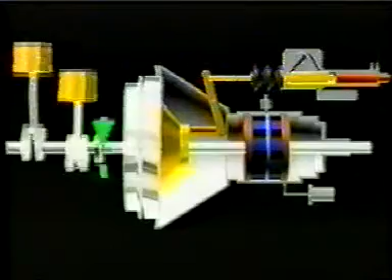The major difference between the semi-automatic transaxle and the manual transaxle is in the clutch pedal mechanism. In the case of the manual transaxle, pressure is applied to the master cylinder when the clutch pedal is pressed down. For the semi-automatic transaxle, however, the DC motor generates pressure and sends it into the master cylinder, because the semi-automatic transaxle has no clutch pedal mechanism. The engine torque is transmitted to the transaxle corresponding to this pressure and the clutch diaphragm force.

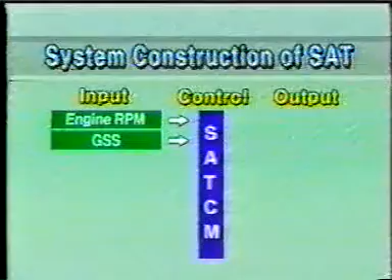The semi-automatic transaxle system is composed of 7 sensors, the semi-automatic transaxle control module, and 4 parts to be controlled. The 7 sensors are engine RPM, the gearbox input speed sensor, the throttle position sensor, the push-pull sensor, the gear position sensor, the clutch release cylinder position sensor, and the actuator position sensor. The 4 parts controlled are the power control unit, the electric valve, starter relay, and the buzzer.

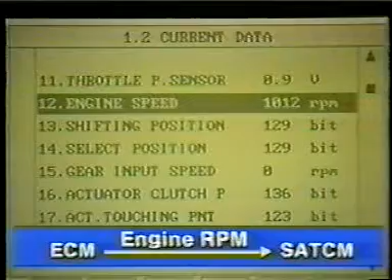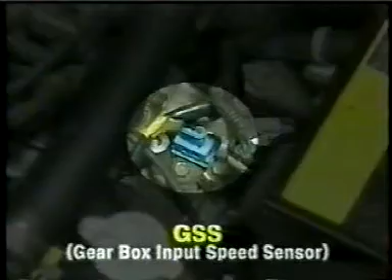The engine RPM signal is sent to the semi-automatic transaxle control module from the engine control module. It determines operation time of clutching and declutching with the gear speed sensor. The gear speed sensor, attached to the transaxle case as a Hall sensor type, detects the rotation of the input shaft and feeds input shaft speed to the semi-automatic transaxle control module. The measuring range is from 100 to 8,000 RPM.

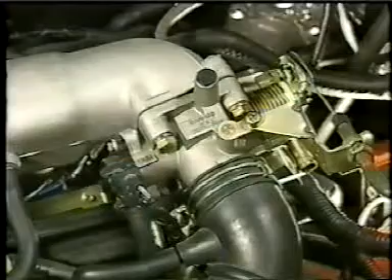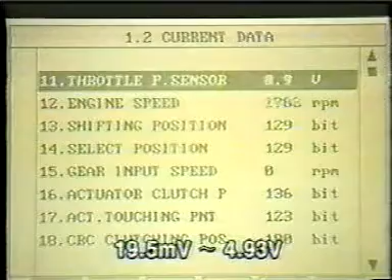The throttle position sensor utilizes a variable resistor to monitor the throttle position. By the opening amount of the throttle, the semi-automatic transaxle control module is able to calculate engine load and vehicle acceleration. The throttle position sensor's maximum value is 4.93 volts, its minimum value is 19.5 millivolts, and the idle range is 6 to 19% opening value.

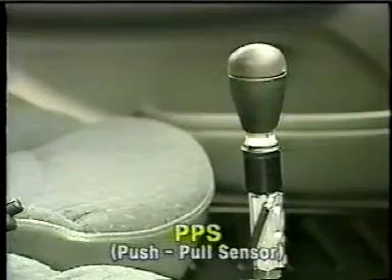The push-pull sensor is placed inside the gear knob. The switch inside the sensor becomes an open or closed circuit according to lever operation. An on-off signal is sent to the semi-automatic transaxle control module so that it is able to recognize the intention of the driver shifting. This sensor has 12 plus or minus 4 Newton meters of operation force and 60 degrees of operation range.

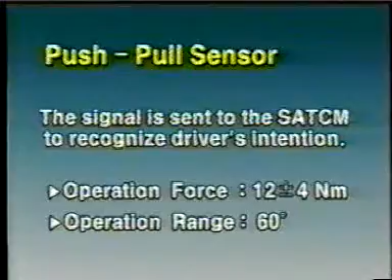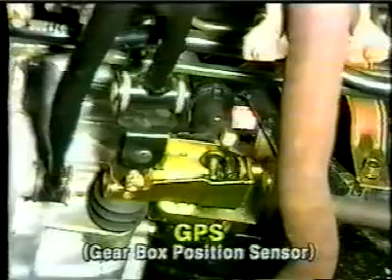The gearbox position sensor, located on the gearbox control rod, monitors the current gear position, sending signals to the semi-automatic transaxle control module. The gear position sensor measures the passage movement, which is the up-down movement of the shift lever, as well as selection movement, which is the left-right movement of the shift lever. It also detects the initial gear connection and the present gear position, providing a basis for operating clutch engagement and disengagement. The operating range of the gear position sensor is 60 degrees in selection and 30 millimeters in passage direction.

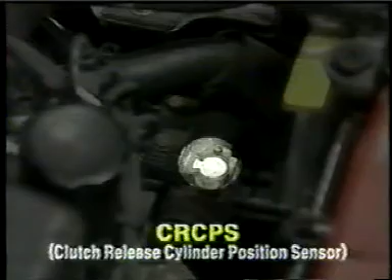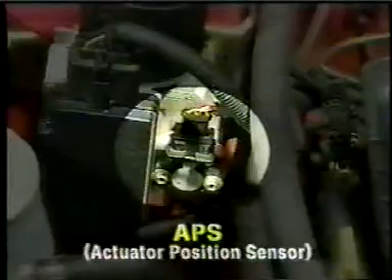The clutch release cylinder position sensor has a function of monitoring the operating distance of the clutch push rod and compensating clutch wear adjustment. The actuator position sensor monitors the position of the DC motor, controlled by the power control unit, feeding signals to the semi-automatic transaxle control module.

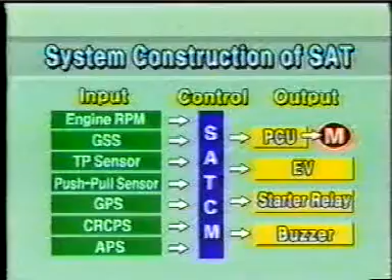Now, we will take a look at the output items controlled by the semi-automatic transaxle control module. The power control unit operates the DC motor on receiving the signal from the semi-automatic transaxle control module. The power control unit becomes ready for operation by receiving the ignition on-off signal. The parking brake is available when the ignition is set to off.

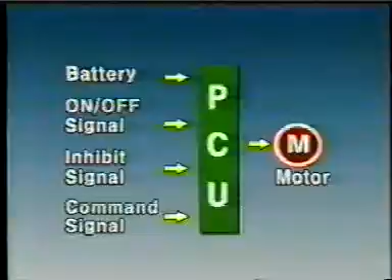The power control unit is composed of an inhibit signal and a command signal. The command signal functions to engage or disengage the clutch through operating the DC motor on the basis of the duty signal of the semi-automatic transaxle control module. A 50% duty value indicates clutch engagement and disengagement boundary. A duty value below 50% indicates operation of the DC motor to disengage the clutch, and a duty value above 50% indicates operation of the DC motor to engage the clutch. Namely, the DC motor's operating speed is controlled by the duty value of the command signal.

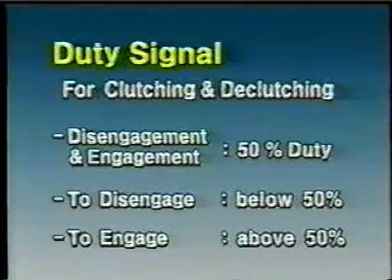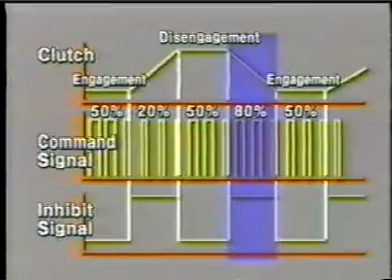The inhibit signal, which controls the command signal for the DC motor operation, controls shifting time. Consequently, shifting time is determined by the inhibit signal, and the DC motor's operating speed in the shifting process is regulated by the duty value of the command signal. The DC motor is controlled by the power control unit.

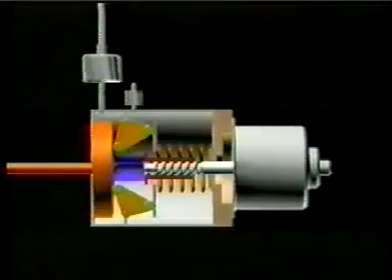The clutch is disengaged when the DC motor operates counterclockwise and applies force to the link and spring, generating pressure into the master cylinder to operate the hydraulic system. In reverse, the clutch is engaged when the DC motor operates clockwise and applies force to a diaphragm spring.

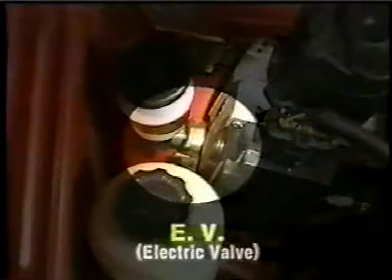The electric valve, which is of the normally open type, functions to open or close the oil passage by the duty signal of the semi-automatic transaxle control module. When the ignition is on, the electric valve closes the oil passage.

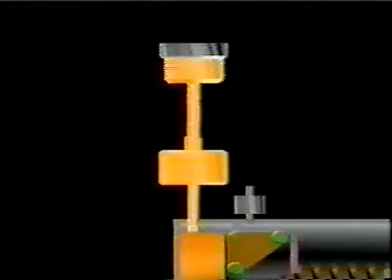When an actuator malfunction is found, the electric valve is opened to engage the clutch by using diaphragm force. In addition, the electric valve functions to compensate for changes in the clutch release cylinder operation distance caused by oil expansion and clutch wear while disengaging the clutch.

The start relay operates at some special conditions to prevent an unexpected accident when the vehicle starts. The start relay allows the engine to run only if the gear is in the neutral position and engine RPM is below 500.

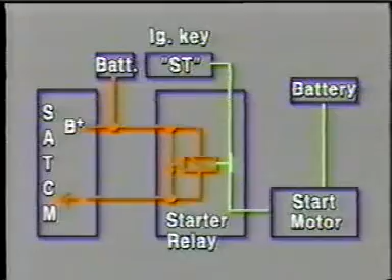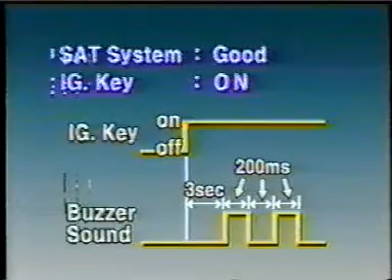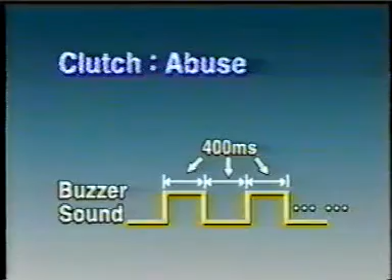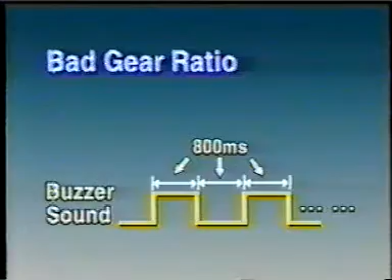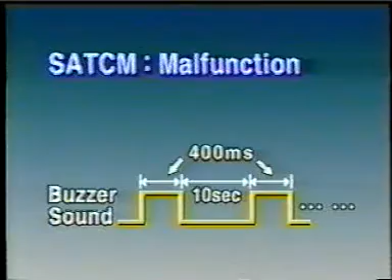With clutch abuse, it sounds continuously for 400 milliseconds every 400 milliseconds. Bad gear ratio, it sounds continuously for 800 milliseconds every 800 milliseconds. Fault in control components, not an operating procedure, and contents of permanent memory are incoherent: it sounds continuously for 400 milliseconds every 10 seconds.

In this turn, we will see the function of the semi-automatic transaxle. The control mode consists of 5 categories: engine starting mode, vehicle drive mode, gear shift mode, vehicle stopping mode, and engine stopping mode. The semi-automatic transaxle enables the engine to start by operating the DC motor to disengage the clutch within 250 milliseconds when the ignition is turned on.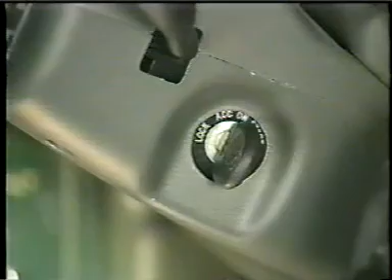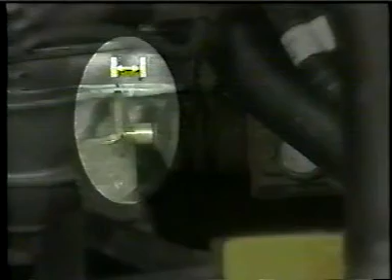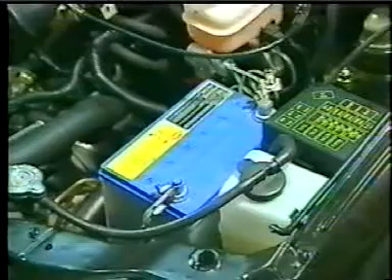The system is energized and the gear lever is in the neutral position. The condition of engine start is gear lever in neutral position, engine stopped, and clutch disengaged. However, if battery voltage is too low, the starting mode will be changed to the pushing mode.

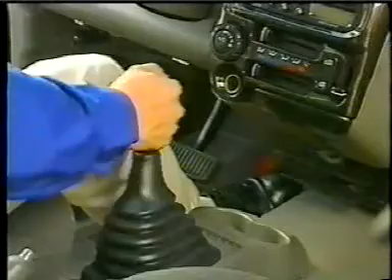Turn the ignition on when the engine doesn't start due to low battery voltage. Push the vehicle to reach approximately 5 kilometers per hour and then shift into second gear so that the clutch gets engaged and the engine starts. On this occasion, the buzzer sounds as the vehicle speed reaches about 5 kilometers per hour.

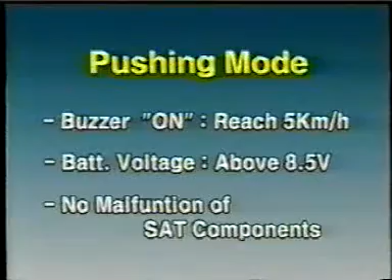However, in this pushing mode, battery voltage should be above 8.5 volts to operate the DC motor, and no malfunction should be found in the semi-automatic transaxle components.

The vehicle drive mode is broken down into accelerator pedal operation and rolling action. The required conditions for the starting mode by accelerator pedal operation are when the vehicle is stopped, the engine is running, and the gears are disengaged.

In this condition, if the accelerator pedal is depressed after shifting into first, second, or reverse range, the engine RPM will increase and the clutch will engage. When the clutch is engaged, the speed of the engine and the input shaft will synchronize.

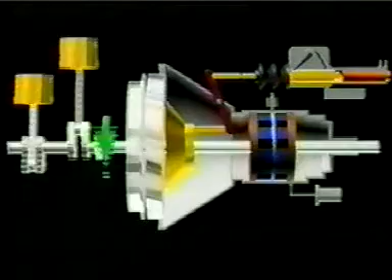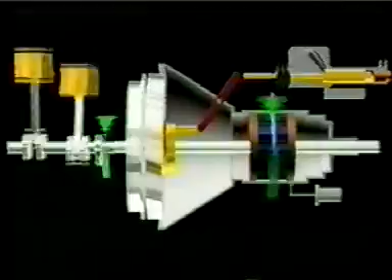The required conditions for the vehicle drive mode by rolling action are that the gear is engaged when the vehicle is on a downhill slope and when the gear speed sensor is higher than the engine RPM. This is to escape the possible danger of causing freewheel movement on tires when the clutch is disengaged.

To eliminate the possibility of such danger, the clutch is engaged regardless of the accelerator pedal when a gear is engaged.

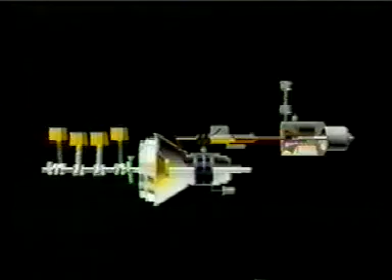The clutch is disengaged as enough force is applied to the gear lever after releasing the accelerator pedal. When a gear is engaged by shifting, the clutch is ready for engagement. At this moment, the depressed accelerator pedal begins the shifting mode. However, if vehicle speed is excessively high, clutch engagement will be limited to avoid overrun.

Under the engine running and clutch engaged condition, if the brake pedal is depressed, the clutch will quickly disengage to reach an idle RPM and the vehicle will stop. When the ignition switch is turned off after the vehicle is stopped, the clutch returns to the engaged condition and the system will be stopped.

The engine starting mode makes it possible to restart the engine, and it is the function of the semi-automatic transaxle control module to run the vehicle by continuously performing the previously explained modes.

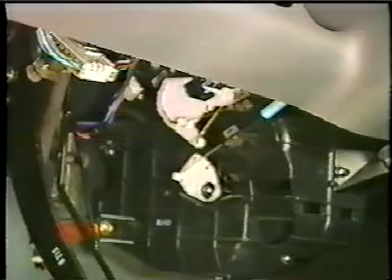The diagnosis of the semi-automatic transaxle system is possible only by the Hi-Scan with the following 5 functions: diagnostic trouble code, current data, flight record, simu-scan, and the learning mode. First, let's see the diagnostic trouble codes of the Hi-Scan.

Please refer to the shop manual for a more detailed description of the related parts when a diagnostic trouble code is encountered.

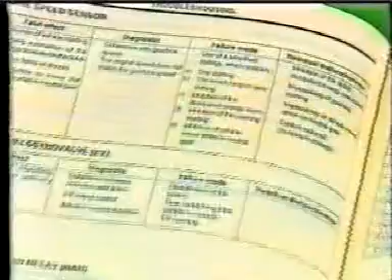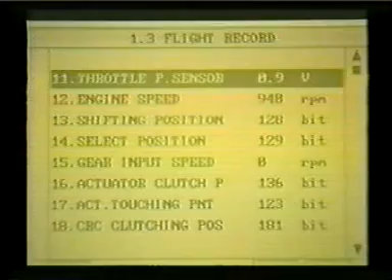Next, current data functions. This data assists technicians to effectively diagnose and repair the vehicle by knowing the current vehicle state. The flight record mode provides the function of recording the value of selected sensors which need checking. A system malfunction might be easily detected and repaired by reviewing memorized data coming from the flight record mode of the Hi-Scan.

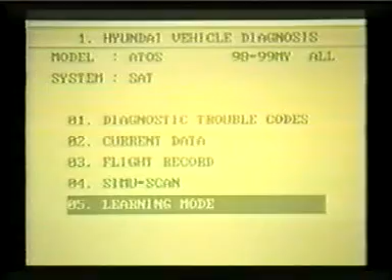The learning mode is used to determine whether the system abnormality remains or not and initializes the initial value of the gear position sensor and clutching point. In addition, the learning mode must be conducted when the semi-automatic transaxle system is manufactured, or when such parts as sensors, actuators, or clutches are replaced.

The engine will not start if this mode is not followed in the manufacturing process. Moreover, the engine will not run, or even if it runs, shifting shock and increased clutch slip may occur in case this mode is not fully conducted after replacing or adjusting sensors, actuators, or the clutch in the field. The learning mode procedure takes 2 to 3 minutes.

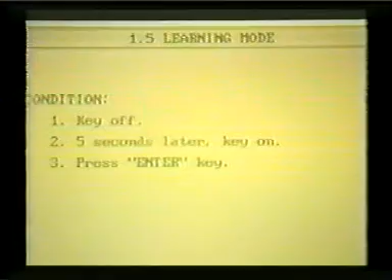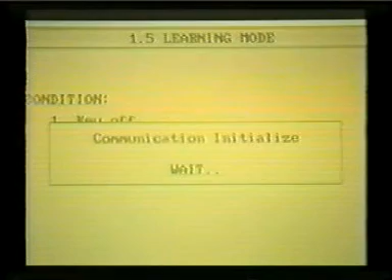An initial screen will be displayed if the learning mode is chosen. Following the order on the screen, turn the ignition switch on 5 seconds after turning the switch off, and the learning mode will begin. Press the yes button if the buzzer sounds. If not, press the no button. In case the buzzer doesn't work, check the buzzer-related items and try again.

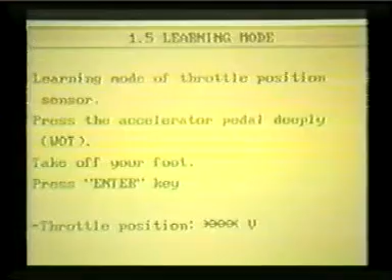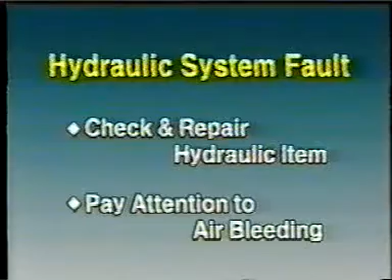The position of the actuator and the clutch release cylinder, with the mention of successful initialization, will be displayed on the screen if the buzzer normally works. When the hydraulic system is faulty, check and repair hydraulic operation-related items and perform the learning mode again. Pay particular attention to the air bleeding state.

The learning mode of the throttle position sensor shows up on the screen. Press the enter button after fully depressing and releasing the accelerator pedal to retrieve the throttle position sensor value. If the throttle position sensor associated items are defective, repair and try the learning mode again.

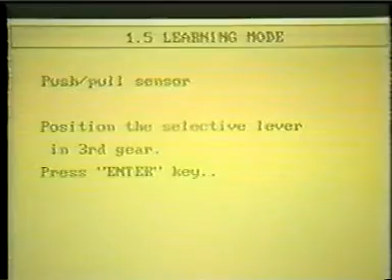With reference to the learning mode of the push-pull sensor, press the enter button after shifting the gear lever into neutral, and press enter after shifting the gear lever into third. In the same way, do this for the fourth gear. If the push-pull sensor related items are faulty, check and repair them and try the learning mode again.

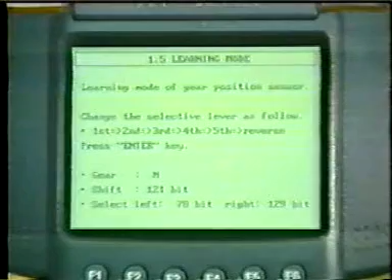The learning mode of the gear position sensor shows up on the screen. Press the enter button after shifting the gear lever into first, second, third, fourth, fifth, and reverse in turn. Keep that condition for a while, verifying whether correct shifting is conducted, and the left-right value of the gear position and shift will be displayed on the screen. In case the learning mode is not progressing, do the learning mode again. If still negative, check and repair the expected items and try the learning mode again.

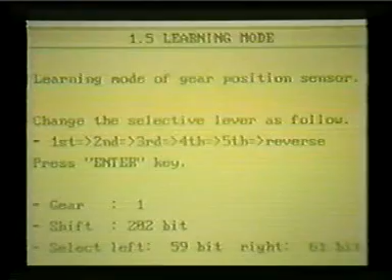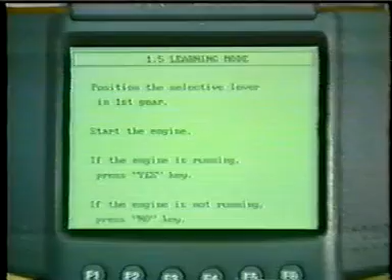Press the yes button when the engine starts after shifting the gear lever into first. If not, press the no button. When the learning mode is no longer progressing after the engine starts, try the learning mode again. If still not, check and repair the gear position sensor related items and try the learning mode again.

Press the enter button when the engine starts after the shifting gear lever is in neutral. If not, press the no button. If the engine doesn't run, the starting system malfunction is expected to be checked and repaired. After that, try the learning mode again.

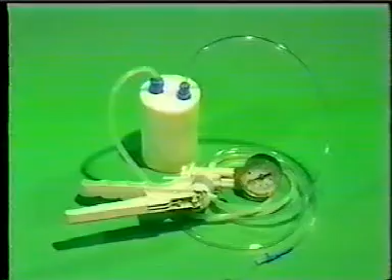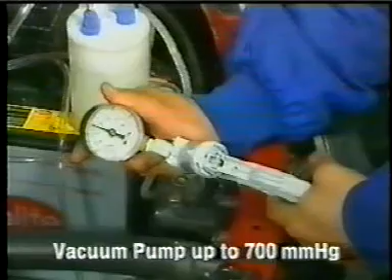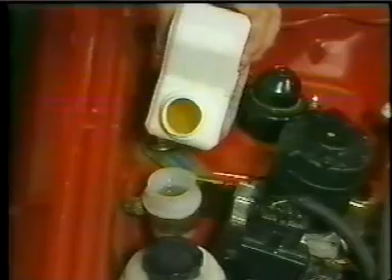Please install the manual vacuum pump and sub-oil reservoir as you see on the screen. Under the ignition on state, open the bleed screw and operate the vacuum pump up to 700 millimeters Hg at least. Turn the ignition key off for 4 to 5 seconds and fill the reservoir with oil. Repeat this process 2 times. Check if air remains in the tube.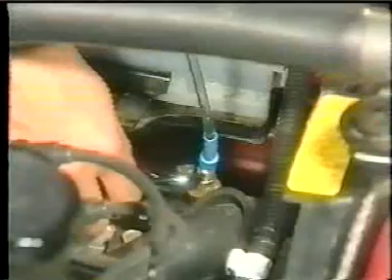If there is a bubble in the tube, perform the air bleeding process more so there are no bubbles, and then close the bleed screw. Measure the stroke length of the push rod in the clutch release cylinder while turning the ignition key on and off. The normal measuring value is 11 millimeters.

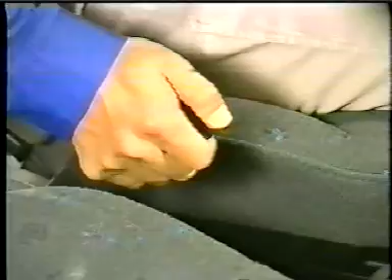As a characteristic of the semi-automatic transaxle, it is recommended to start the vehicle on a downhill or uphill slope by using the side brake. The push-pull sensor placed onto the gear knob is so sensitive that frequent gripping of the gear knob might cause declutching.

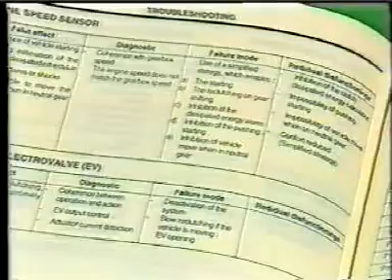So far, we have briefly learned about the semi-automatic transaxle system. We hope this information helps you understand, and please take reference to the shop manual when trouble is encountered.